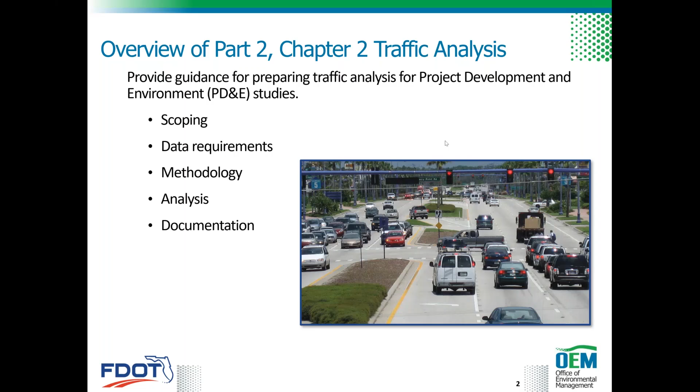May I ask, from the audience, who has performed traffic analysis or is at least familiar with traffic analysis and terminology? I'm not sure, Pete, if they can do a raise of hands. I'm checking right now. Anyways, I might not be able to see the answers, but okay. Oh, I see the hands now, sorry. Awesome. So that is very good, because at least I know that you're familiar with the terminology. Okay, so the computer is being lazy today, all right?

So traffic analysis, the definition is an evaluation of the interaction between demand and supply of a transportation facility. Demand being the amount of traffic load that intends to use the facility, and supply, of course, being the capacity of the facility that will handle the demand. The traffic analysis is one of the critical activities for a PD&E study, which forms the basis for developing and evaluating project alternatives.

So it is important for the project manager to understand the effort required to successfully perform a traffic analysis. Each transportation project is unique, and the approach for individual projects might differ. So it's not a one-size-fits-all, right? So therefore, when developing the project traffic data and performing the corresponding analysis, the project manager must always balance between the project's goals and objectives, the available schedule and budget, and the complexity of the analysis to be performed.

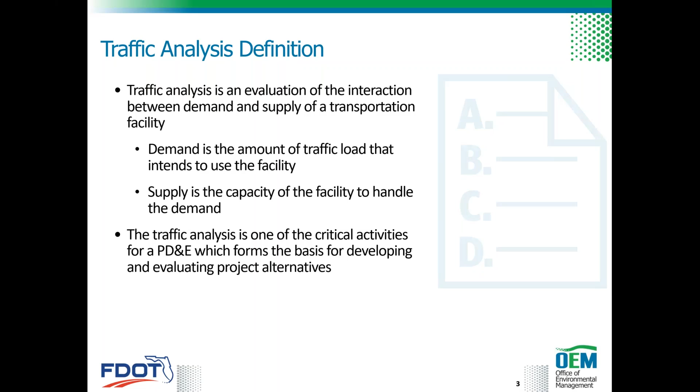Okay, so the traffic analysis in PD&E includes the development of traffic analysis objectives, select performance measures, determine the analysis approach and select analysis tools, identify the data needed for the analysis, specify collection methods and documentation, perform traffic operational analysis and safety analysis, and also document the analysis results and assumptions.

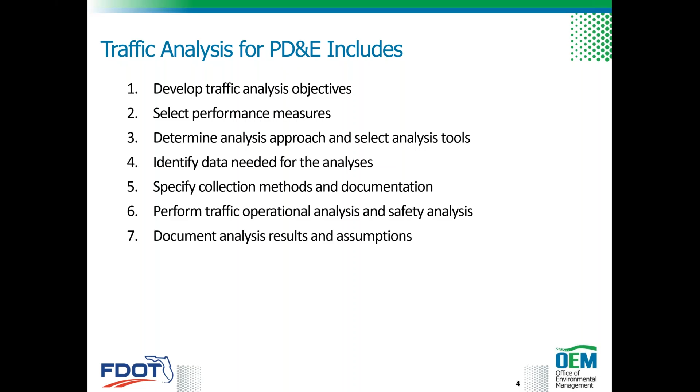And of course, I'm sure you're familiar with some of the resources, at least at the department. We have the Traffic Analysis Handbook, Project Traffic Forecasting Handbook, the Traffic Engineering Manual, and the Manual of Uniform Traffic Studies. And in addition to that, the department has adopted the HCM, or the Highway Capacity Manual, and FHWA's Traffic Analysis Toolbox.

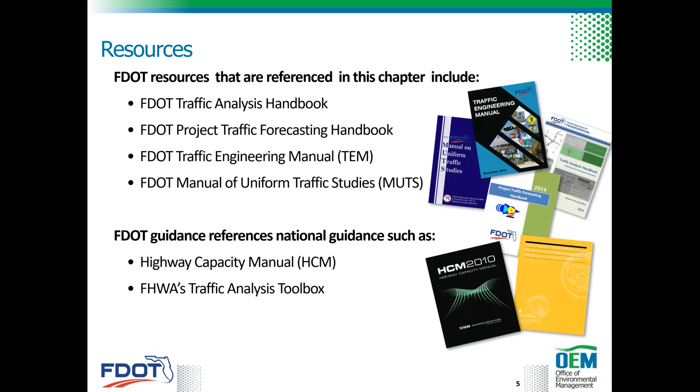So what is the objective of the traffic analysis? It is first to reflect the purpose and need for the project and be measurable. Identify the performance problem or goal which the analysis seeks to answer, and it should identify the intended use and decision makers of the traffic analysis results. So before establishing the traffic analysis objectives, the project manager and the project team must review the purpose and need for the project, previously completed planning studies, and the ETDM programming screen summary report, as these documents are essential to determining both the objective and the scope of the traffic analysis.

In scoping the traffic analysis, since the PD&E studies vary in size, type, and complexity, this results in project traffic analysis with varying levels of detail. So these items here on the screen are items that inform traffic analysis scope. For example, the traffic study limits, the design years, other analysis requirements such as economic, air quality, and noise analysis, and special needs such as multimodal.

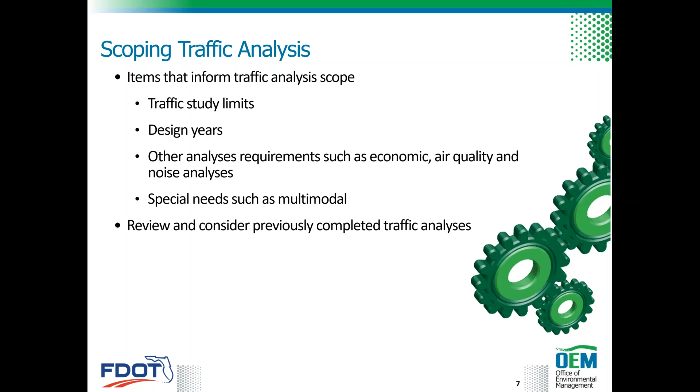In addition, the traffic analysis may have been prepared previously as part of the corridor study, feasibility study, or even an interchange access request, or IAR. In this case, the project manager must review and consider previously completed traffic analysis reports when scoping traffic analysis during the PD&E phase. And coordination with the planning office is very, very important in this step.

So what are the performance measures of effectiveness, or MOEs? The project manager must select the appropriate MOEs based on the needs and context of the project. These help compare the performance of various alternatives to achieve the project's traffic operational objectives. It is important that all stakeholders associated with the project agree to the MOEs and the analysis tools before the project team begins the analysis. This is documented in the traffic analysis methodology.

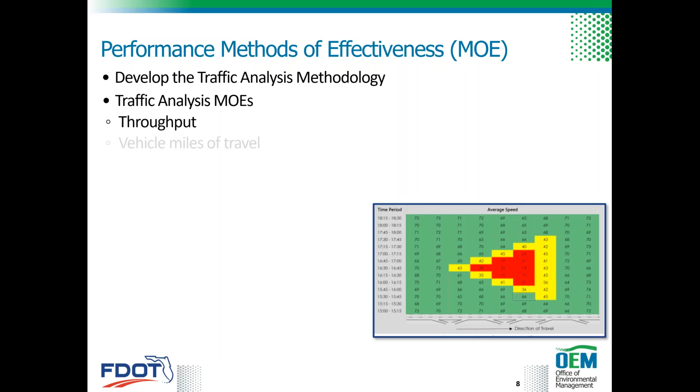There are various MOEs to choose from. Typical vehicular performance measures include throughput, vehicle miles traveled, volume to capacity ratio, travel time, travel speed, queue lengths, number of stops, density, and of course the most popular that everybody talks about is level of service, right? Hours of congestion, travel time variance, and travel time reliability.

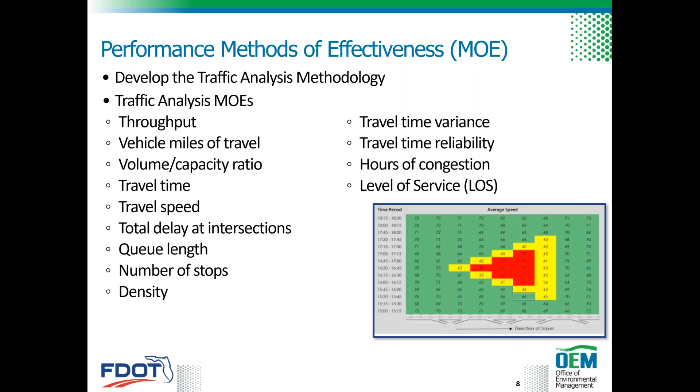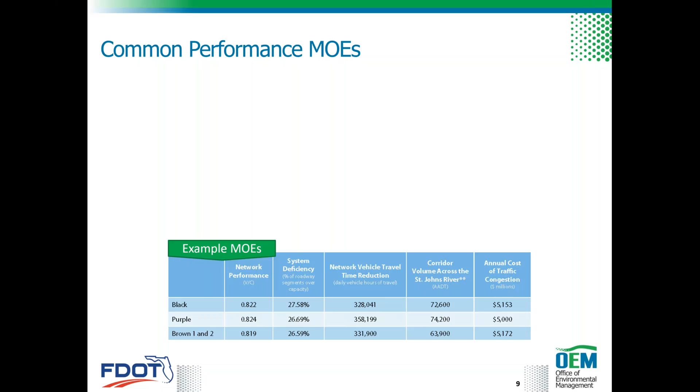And depending on the purpose and need of the project and the problem to be solved, there are other common performance measures that can be used to compare and contrast the performance of various alternatives. This includes safety, environmental, and economic MOEs. And these are typical safety MOEs and environmental and economic MOEs. I'm not going to go specifically through all of them. You can find more detailed information about these in the department's PD&E Manual and other guidance documents.

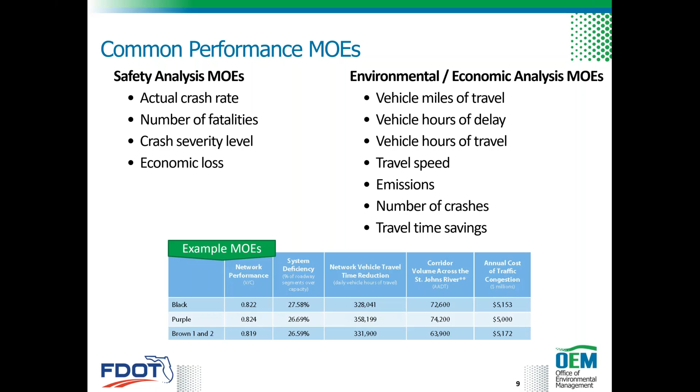So selecting the right traffic analysis tool, like I said, is really important. And this will, again, vary on a project-by-project basis. Selecting the right analysis tool should be based on the complexity of the project, the magnitude of the traffic problem, the performance measures, and the limitations of the tools. For this, the Traffic Analysis Handbook should be consulted since it contains guidance for selecting the appropriate tools.

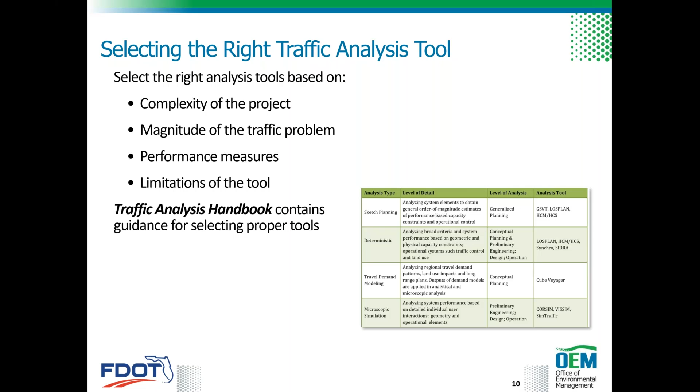So data required for traffic analysis depends on various factors, such as the project context, the limits, analysis methods, performance MOEs. And the data collection must include the traffic analysis area, which may at times exceed the project limits. The FDOT project manager and the project team must gather all existing available traffic information from FDOT databases, from past studies, prior projects, and other analysis performed within the project area. This information is essential to understanding general knowledge of the project area and identifying any gaps in data that must be included in the data collection plan for the project.

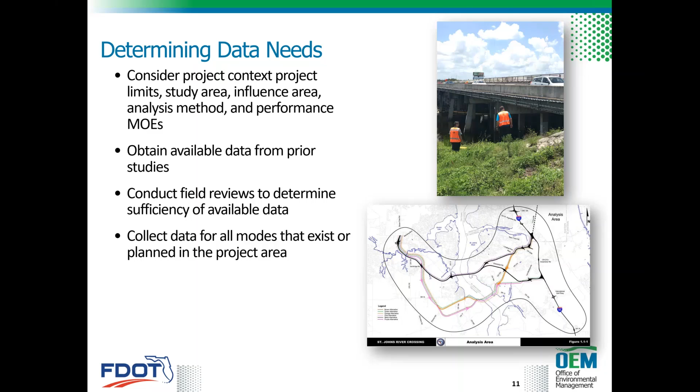The data collection effort can be divided into 3 categories: roadway characteristics, that includes number of lanes, lane width, the presence of bike and pedestrian facilities, shoulder width, lateral clearances, railroad crossings. Also, the multimodal characteristics of the facility, that includes volumes, truck percentages, pedestrian counts. And in addition, operations and safety characteristics, such as the posted speed, queue locations and lengths, number of crashes and locations, and the severity of crashes. And talking about crashes, the most typical length of crash data is a total of 5 years for the crash analysis.

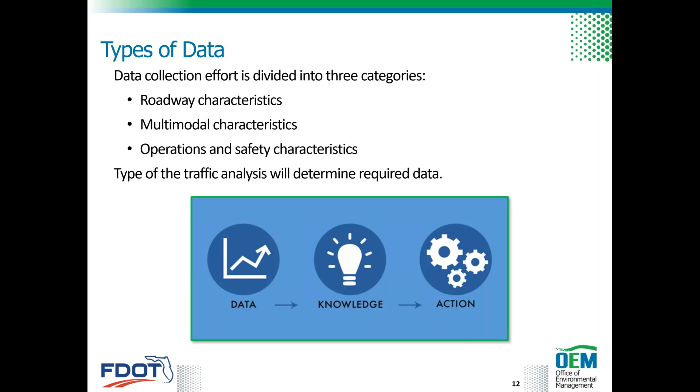So project traffic forecasting is the process of estimating the future year traffic demand for a given project, the future years including opening, interim, and planning horizon or design years. Detailed guidance for the traffic forecasting process can be found in the Project Traffic Forecasting Handbook. There are two options for forecasting traffic volumes covered in the handbook: forecasting traffic with a travel demand model or without a travel demand model. Because of limitation of time, we're not going to go into details of this today. There are several available trainings, and again, you can go to the CBTs available from OEM.

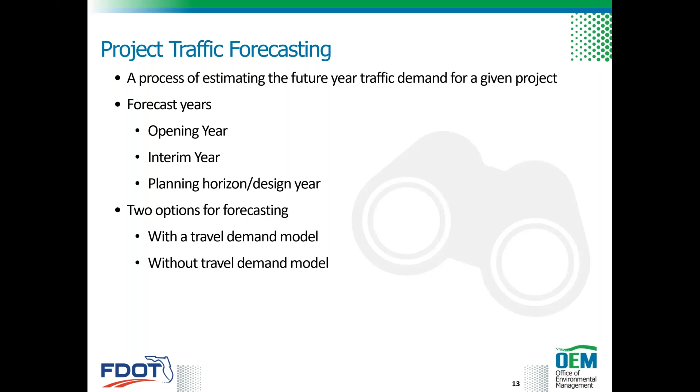So the majority of traffic forecasting and analysis should be completed during the PD&E phase. Once the traffic forecast and analysis is completed, the subsequent phases, design and construction, should use the same traffic data for design and operational purposes, such as designing turn lanes, signal timing, or traffic control plans. As the transportation project advances, it may require a reevaluation, and you can find information about this in part 1, chapter 13 of our manual, and I believe tomorrow we have that as a topic, or maybe later this afternoon.

So during the reevaluation, the project manager and the project team must decide if the traffic forecast and analysis prepared for the project should be updated. The PM should verify the validity of the traffic forecast by assessing whether there have been changes in conditions or assumptions brought by substantial changes in the economy that may affect driving habits, such as an economic recession or sudden change in gas prices since the forecast was prepared. Another would be substantial changes in land use types or growth rates and patterns within the study area, for example a large-scale development, such as sector plans approved near the study area, which have the potential to change traffic generation or travel patterns.

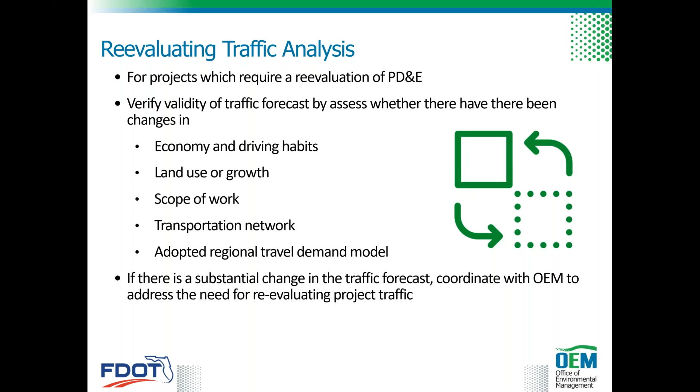So the traffic analysis includes both a capacity analysis and an operational analysis to determine how well the project alternatives are meeting the project purpose and need. Detailed evaluation of project alternatives should only proceed on viable or feasible project alternatives.

The PD&E Manual Part 2, Chapter 3, the Engineering Analysis chapter, provides guidance on how to evaluate the alternatives. In order to rationally compare multiple alternatives, the same assumptions and a consistent set of tools should be applied. That's basically to compare apples to apples.

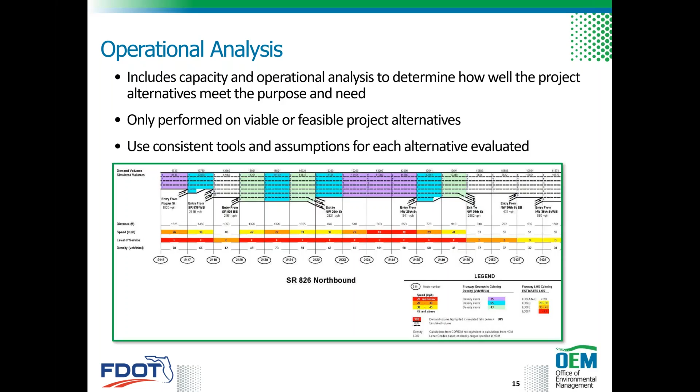All right, so the safety analysis includes the crash history analysis, which is usually 5 years. And this is, of course, within the project limits to assess the existing safety performance and evaluating potential safety implications of a project. Depending on the project context, safety assessment of the project may use the Highway Safety Manual, or HSM, methodologies and their tools.

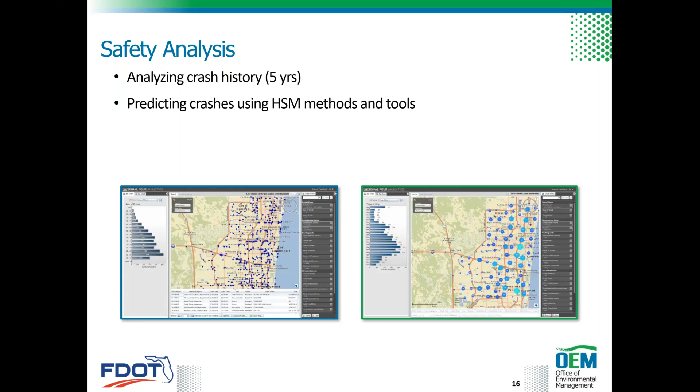Okay, so now let's talk about one of the technical reports. This is the Project Traffic Analysis Report, or PTAR for short. So the PTAR documents the assumptions, the methods, the traffic forecast, the design traffic, and the results of the traffic analysis for the project in plain language and an easily understood format.

It summarizes the data collection effort, the input parameters, the traffic analysis tools, the existing conditions, the development of future traffic forecasts, and traffic operational and safety analysis of the project alternatives. The traffic analysis report supports decisions regarding the project actions.

Therefore, the report should concisely present the results of the traffic analysis in a manner that can be readily understood by a variety of audiences. The discussion of the analysis results should be focused and avoid unnecessary information. Additionally, the report should include text that discusses information presented in tables and figures, maps, diagrams, and those are very helpful.

And also the scope and the size of the report depends on the size and complexity of the project. I don't think we can address that enough. And also whether the traffic analysis conducted prior to the PD&E phases are going to be incorporated. Traffic analysis reports for projects that are not complex can include the results of traffic forecasting.

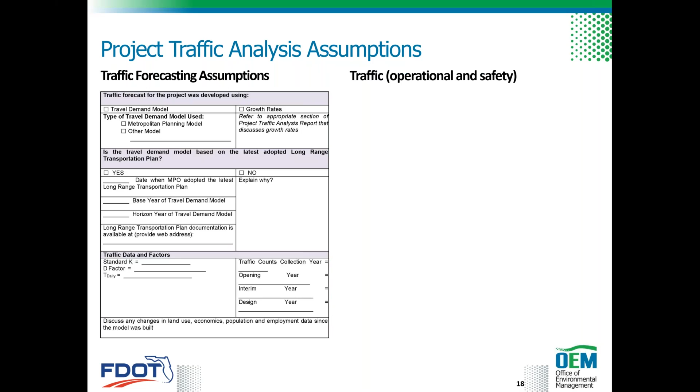Right, so some of the traffic forecasting assumptions. The PTAR must be reviewed and checked for quality and for reasonableness of the results. The review of reasonableness of traffic projections should include examining and comparing observed traffic and historical trends, proposed roadway and transit network improvements, and land use projections.

Quality control review for traffic analysis results should include reviewing methods and assumptions used to develop the analysis, the inputs, reasonableness of results, and completeness of the results. The assumptions used to prepare the traffic analysis, including traffic projections, should be documented so that the reviewer can easily understand the methodology, input values, analysis results. The traffic analysis assumptions are discussed and agreed upon during the development of the methodology.

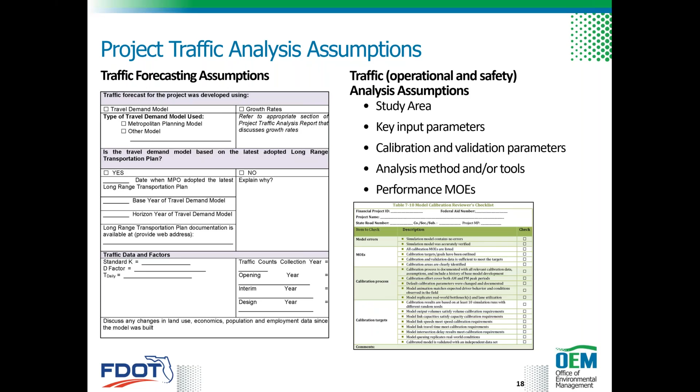Then the traffic analysis methodology itself, which describes the tools, software used for the analysis. Then the existing conditions analysis, and this summarizes the balanced turning movement counts for the study intersections or interchanges under existing conditions, and also summarizes operational and safety analysis for the existing conditions, including development and calibration of microsimulation models as applicable. Then also the development of future year traffic forecasting.

And also it needs to include the alternative analysis section, which provides a description of the project alternatives, assigning of project traffic volumes to alternatives, and a summary of operational and safety analysis for each project alternative. Also, it needs to include a summary of analysis results. And this section provides a narrative of the advantages and disadvantages of alternatives with respect to the traffic analysis objectives and goals. And finally, the raw data used to prepare the input and analysis summaries is included as an appendix to the PTAR. Other supporting data and information should be attached to the report in the appendix.